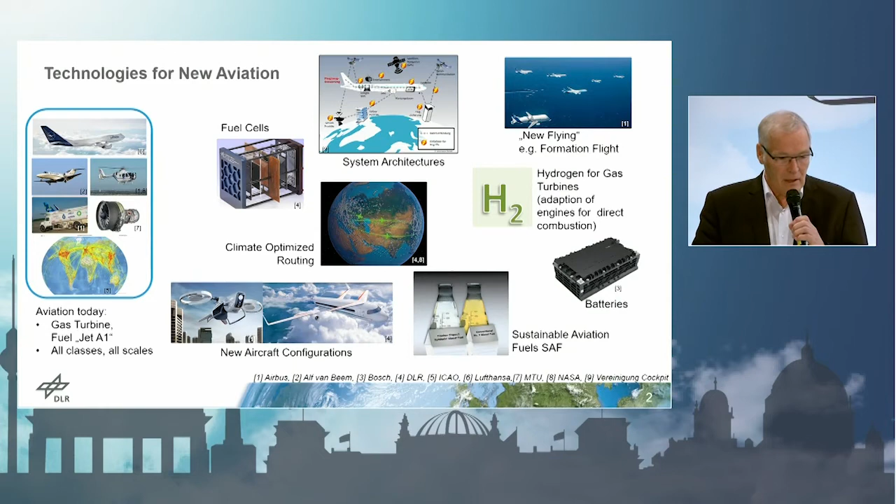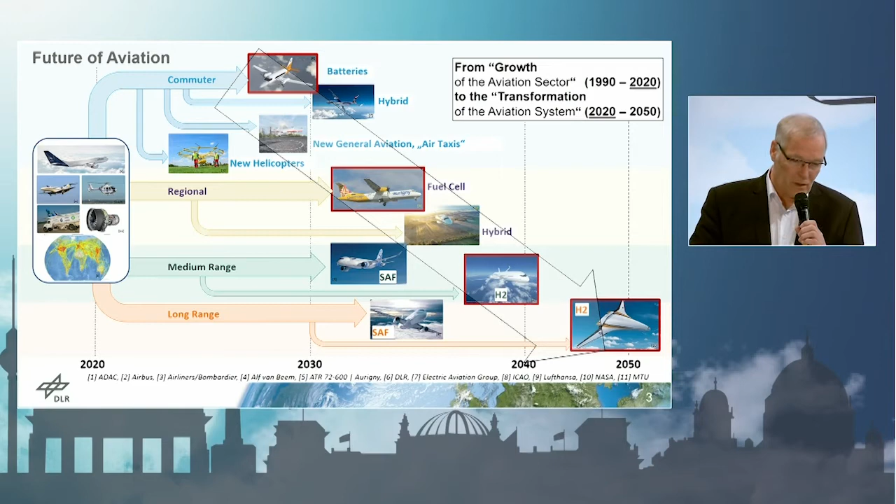Now we can use this toolbox for the future of aviation. It probably will start with smaller aircraft, and there we can check out very many things - batteries, fuel cells, flying fuels, etc. And then step by step go until we reach the long-range aircraft. Maybe this will be the hydrogen one in 2050. In general, from the growth - we have really stable growth for more than 30 years, 3 decades - we're now in the transformation of the aviation system for the next 3 decades until we have the Green Deal in 2050. So that could be the future, and the future may be long range with hydrogen.

This is a very famous picture from climate research. It shows the cooling and warming effects of different impact factors in aviation. On top you see CO2, but it's just one impact factor among several others, like NOx, water vapor, sulfur, etc. Almost 65% of aviation climate effects are non-CO2, so just 1/3 is CO2, 2/3 are non-CO2. Hydrogen application will not prevent all of these non-CO2 effects.

You see the arrows on the left-hand side. What's coupled to H2, if we burn it with the atmosphere, we will have NOx, water vapor, contrails, induced cirrus, contrail cirrus - so there will be a couple of influences and impacts even if we use H2. I'm in favor of everything, but we have to keep that in mind and find a solution for it.

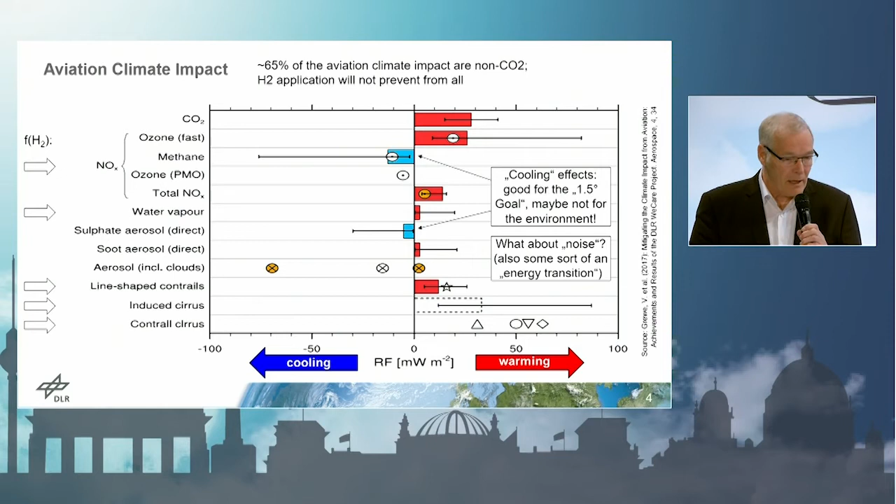There are a couple of papers around, some we introduced yesterday. We have the hydrogen-powered aviation strategy paper from joint undertakings, FCH and Clean Sky. We have in Germany the national H2 strategy, and we have the hydrogen strategy of the Commission. Application of hydrogen is by no means new - even the first balloons some 200 or 300 years ago flew with hydrogen, the first Zeppelins flew with hydrogen. We now see many European papers.

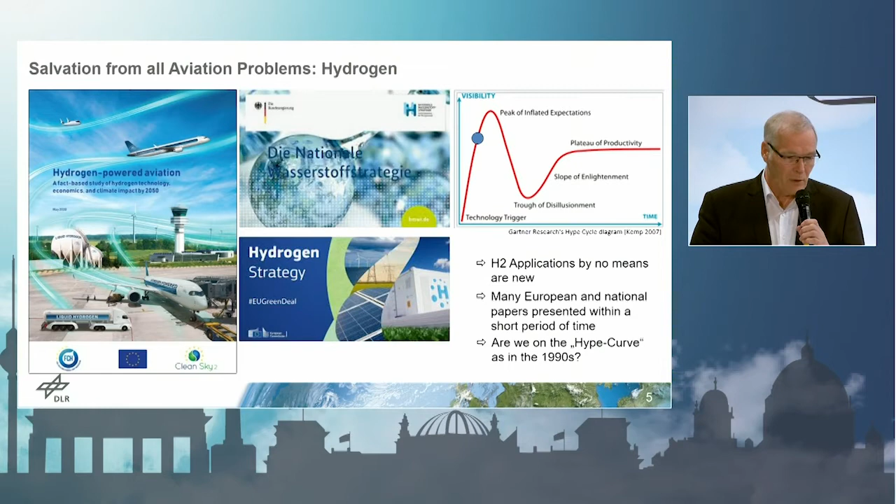The question is, are we on a hype curve, which you see the famous one on the top right? Are we there? That would be a danger, because then we could inflate the expectations from hydrogen. We really have to keep in mind there are a couple of problems around it. It's not salvation from all aviation problems. We really have to work on that, and there's a couple of things to do in research.

Now we are in this propulsion panel. See again what Conny already introduced, our speakers, our six speakers: Boscarol from Pipistrel, Marco Protti from Leonardo, Siegfried Knecht here with us from AREG, Rob Watson from Rolls-Royce, Jörg Sieber from MTU, and Nico Buchholz also here on stage as a senior aerospace executive. I would like to start with the first question to Ivo Boscarol, and he will give us a short presentation. The question would be, with Pipistrel being a forerunner in electric flying, what are your current plans and which are the big challenges ahead of you? Ivo, please.

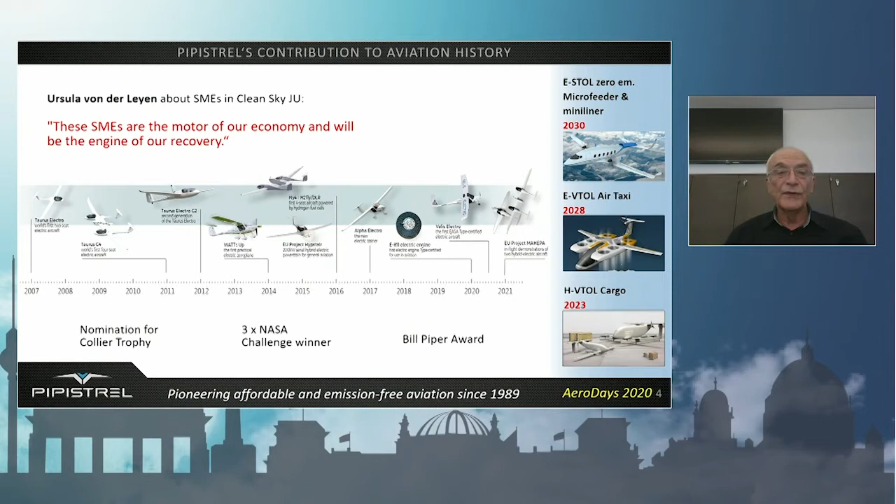I see that the slide is not the correct one. Sorry, the slides are not following me. Oh yeah, okay, I see. It's slow, this button, sorry.

Nowadays we are bringing passengers to the airports, which is wrong. It should be the opposite. We are destroying the best agriculture land to build large airports. We need a new concept which will bring the airports closer to the passengers.

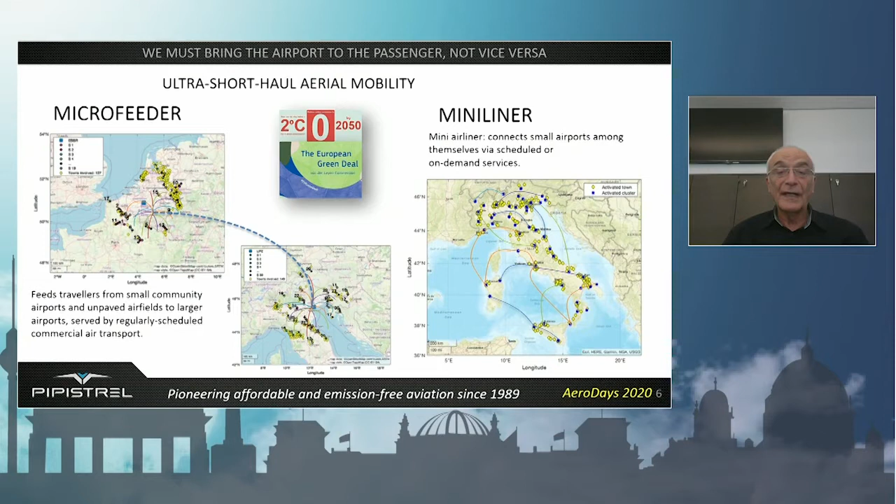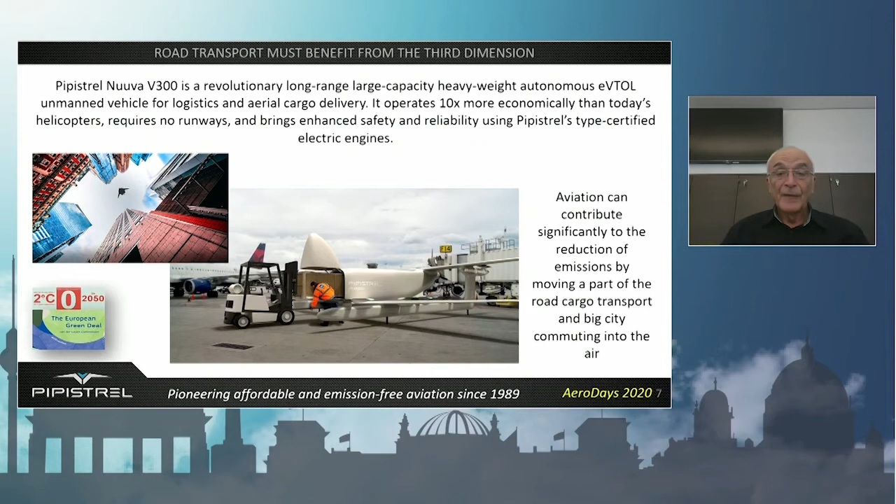Transport in the next decades must also be regional transport, and must be legalized also on small airports. But because of the increased population, better travel comfort and safety standards, the transport is increasing every day. Therefore, the existing mostly two-dimensional concept of transport is not efficient enough anymore.

We must benefit from the third dimension and we must move travels and transport into the air. We have only one way forward. All the participants must step together and the result must be reached. If we don't reach the results, and we don't all work in one direction, it will not help.

The atmosphere needs action immediately. European Green Deal guidelines are to be implemented to reach the needed and desired results, and must be followed also after 2030. By type certifying electric aircraft, Pipistrel opened the doors towards commercial use of electric aircraft.

Now, worldwide regulatory institutions must work hand in hand with stakeholders. I believe that automotive and aviation industry must cooperate in this process. Automotive industry must bring its standards closer to aviation ones, and aviation industry must adopt the advantages of lean and mass production, to make tomorrow's transport industry stronger and more profitable to meet the needs of citizens.

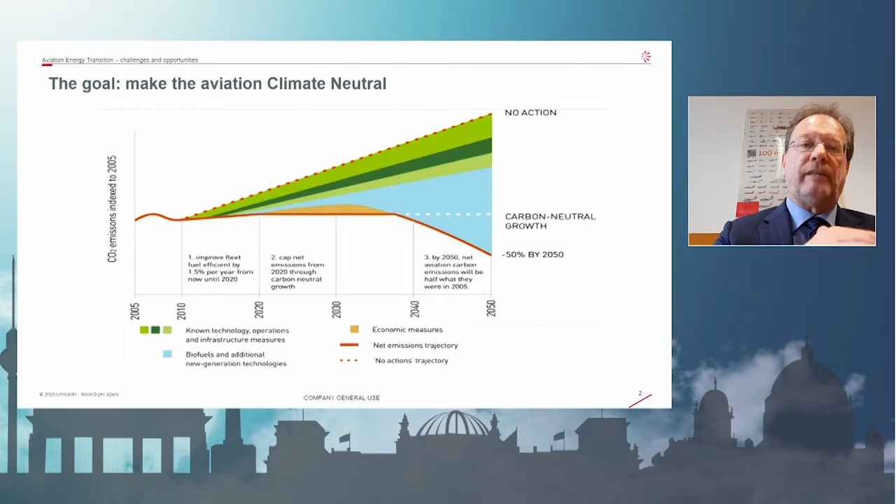We need to have a step change. We need to take a different approach compared to what we have done since 2007 in Clean Sky 1 and Clean Sky 2. Next, please.

We need to have a systemic approach in which we look to the full chain that provides, at the end, a safe, economic and sustainable air mobility for the benefit of our society, but fully compatible with the climate of the Earth, that is the only one that we have to use.

And there are four main areas that we have to address in a combined way, to accompany the transition across the standard way in which we are now managing air mobility, to a completely different approach that at the end complies with the basic requirements that air mobility has to satisfy in order to be an effective solution for the society. Next, please.

In doing that, we need to recognize that this is also an opportunity for our arena, in order to bring in new market opportunities, to mature products that can be different from the ones that we have now in our portfolio.

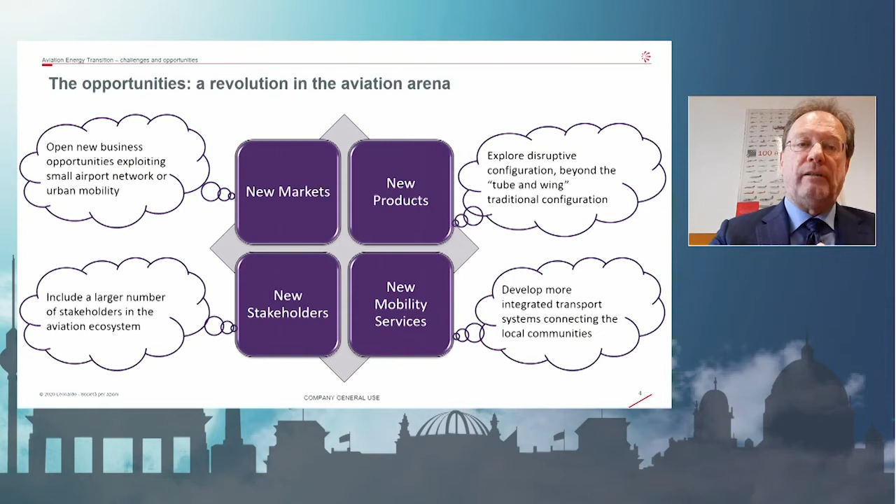But we need to recognize that we have some challenges in front of us, because we plan to use a quite different class of product, and we need to overcome some barriers that come from different business models, by the need to rediscuss some certification paths that we usually have in mind, that we need, in any case, to deliver competitive solutions for air mobility, not only in the production of the new aircraft, but also the capability to support them.

And all that, of course, while we are maturing a completely new set of technologies that are necessary to implement this solution.

So we need to start a roadmap, well integrated, that from the maturation of key enabling technology will at the end deliver new air mobility solutions that include not just the aircraft, but the whole chain, from the production of the fuel, to the delivery of the fuel to the airport, to the capability to operate safely the new type of product, and at the end to deliver air service at competitive price to society. Thank you.

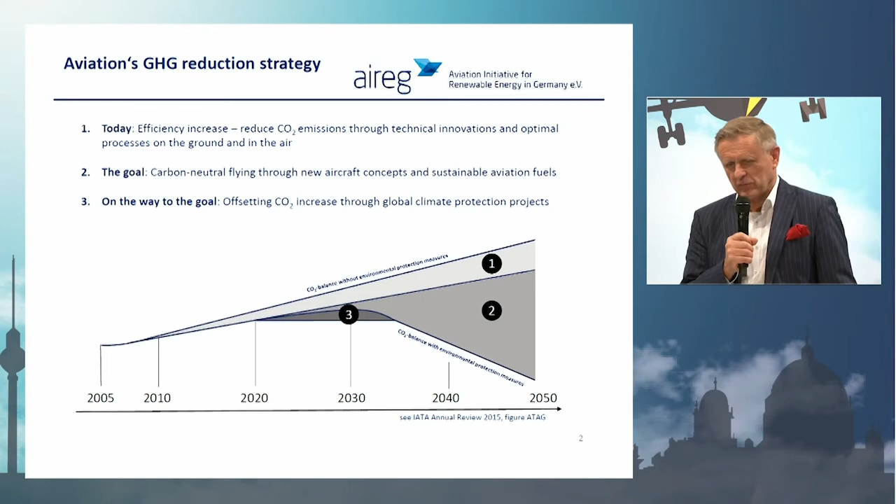You've seen this slide, I assume, a thousand times, and it was also shown a couple of minutes ago by Marco. What I'd like to emphasize here again is the light gray part of it. Of course, we all know there will be disruptive aircraft technologies available within the next one or two decades, but I, or the aireg members, are convinced that a major contribution will come, or needs to come, from SAF, from sustainable aviation fuels.

Today there is only little SAF available. You know, there are very few companies producing it today. World Energy in the US, Neste in Europe, just to name two of them, of the very few.

But I would say there is light at the end of the tunnel, because we learned recently that those engaging in the production of sustainable aviation fuel will probably make available around 10 million tons by 2030. And in addition, I also recently learned that there is basically enough feedstock available already today to comply with the amount of kerosene needed by 2030.

Of course, feedstock availability is one thing, production is a different story, so we need to see how this is going to evolve. But I guess we all need to take into account all the technology pathways and not only look, as is apparently being done in my country, only at the power-to-liquid pathway, because that's only being made available in significant amounts beyond 2030.

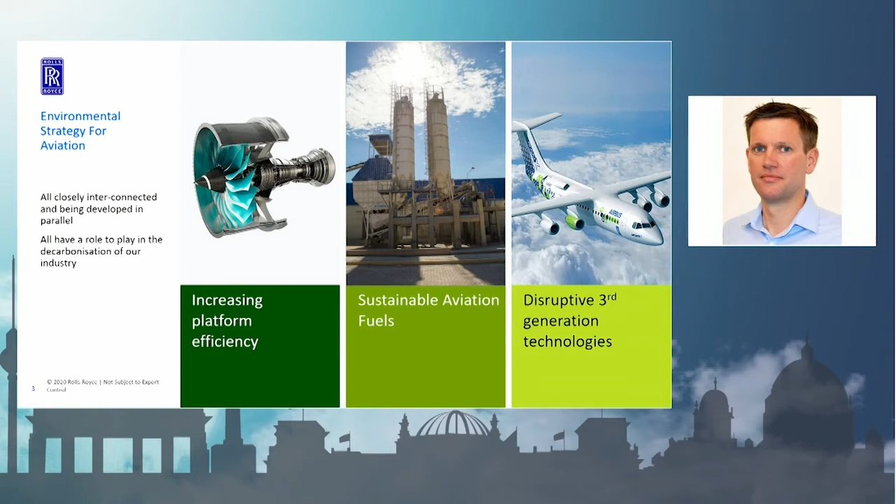But of course, we're also a global technology company, and my particular focus is in looking at those disruptive third generation technologies. Here, I think particularly the focus on electrification and what that may enable, and over time hydrogen, become really important.

And it is a significant number, and we will need to think about multiple ways to develop that fuel of the future. But for me, on slide 5, it's really all about the disruptive technologies. In Rolls-Royce, we've been looking at how we can bring our capability to bear to drive different options to push for sustainable aviation. Electrification, as Ivo has said, is hugely exciting with some great opportunities, both by driving hybridization, which I think gives it range and capability quickly, and full electric capability.

Those pictures you can see on the left-hand side - we're really proud to be supporting Airbus with the City Airbus demonstrator program, and we're developing our own hybrid system which could run in hybrid or full electric mode. In the middle of the slide at the bottom, you'll see the Airbus E-Fan X... I mean the Airbus aircraft we're planning to fly in the next couple of years, which will demonstrate the benefits of that hybrid and electric capability. In recent years, we've been very proud to partner with Airbus around the E-Fan X program, which has taught us so much about megawatt scale electrical propulsion requirements.

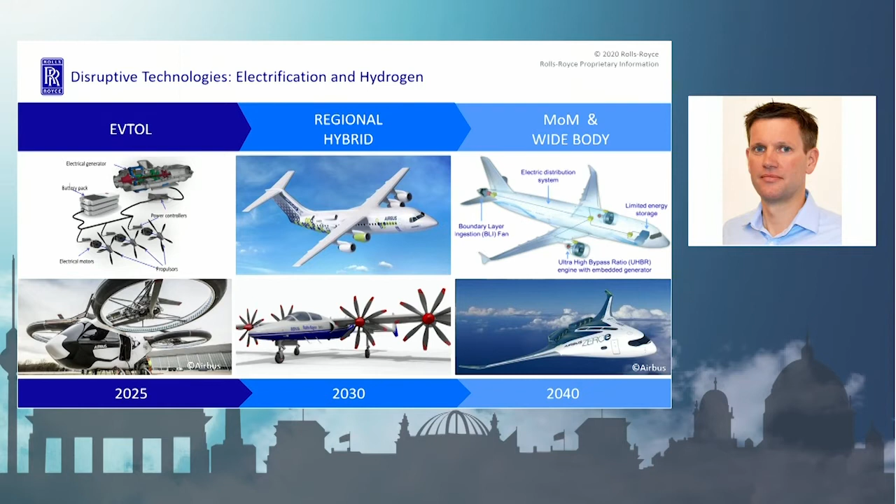How fast can we go to address some of these changes? And what is the true scale of the investment required to deliver this? Are we ready to invest sufficiently to drive the opportunity?

And I think at the same time, there is also a challenge. We talk a lot about the ecosystem, an enabling ecosystem, as Ivo described so brilliantly, how we should rethink travel. But we also need to think about the ecosystem in terms of how we deliver the technology. The supply chains don't exist today for some of this. It's very hard to create this new industrial capability. So alongside the focus on how quickly can we demonstrate something, how quickly can we move to a prototype, how quickly can we scale industrial capacity to help us realize the vision.

A further challenge we have to be thinking about today is commercialization, and some of my esteemed colleagues have already mentioned this point. Operators today want to see a new technology where the acquisition cost is cost neutral to introduce to a platform. And alongside that sustainability delivery, what about the operating cost? How do you drive down operating costs? How do you make this commercially irresistible to the market? There are huge challenges around how you translate technology into products that we need to recognize.

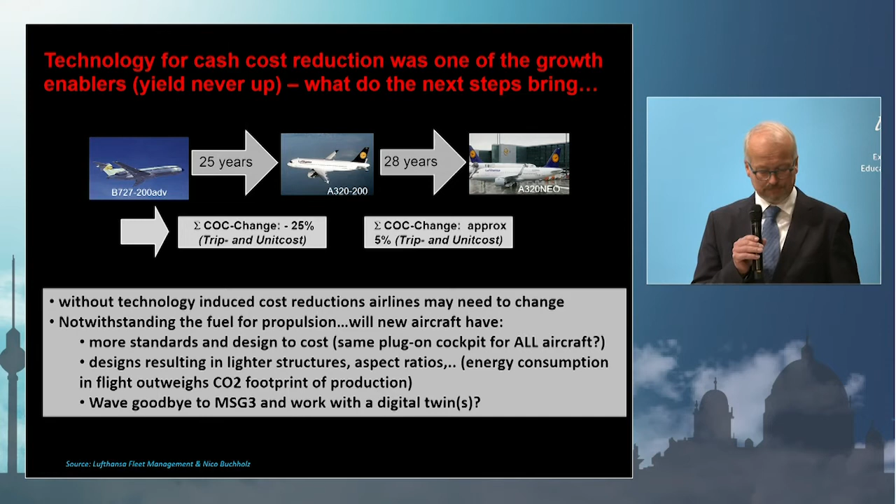But at the same time, knowing that these technologies and cost reductions have triggered growth, we have to look at what's next. And next, we're currently focusing on global warming or CO2 reduction, knowing that we need a holistic approach, as some of my previous commenters have said already. And so we need a global approach. A global approach really means—let's look at aviation. There are many bubbles around the world who want to create something as an alternative. We do have aviation—let me just pick a couple of things.

There's no real choice for urgent cargo, and the crisis has shown us that. There's no real choice for long-haul traffic unless we take a long, long time off. And we have a globally very fragmented view on air traffic. So in the past, fuel was just a cost element—I'm a bit provocative on that, but for most of us in the industry it was just a cost element. We became environmentally friendly by saving fuel, but it also hit the balance sheets.

If we look at tomorrow, we have hydrogen, we have fuel cells, we have many other options. And those options need to be assessed properly in order to be affordable, and they need to be embedded in a global policy, because we can't anymore create an environment by a certain region of the world or a certain company. I remember times when there was the noise perception—apparently there were lots of different ears around the world, even looking at Germany, France, the US and Asia. And we can't afford that split anymore.

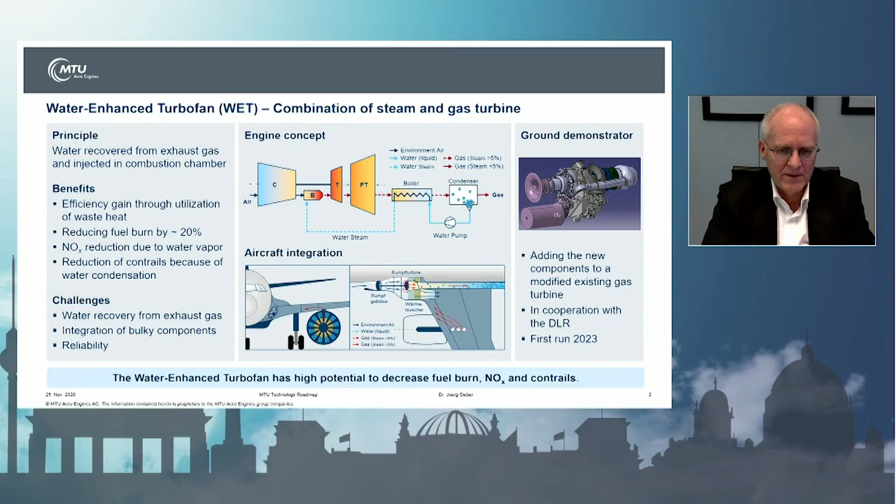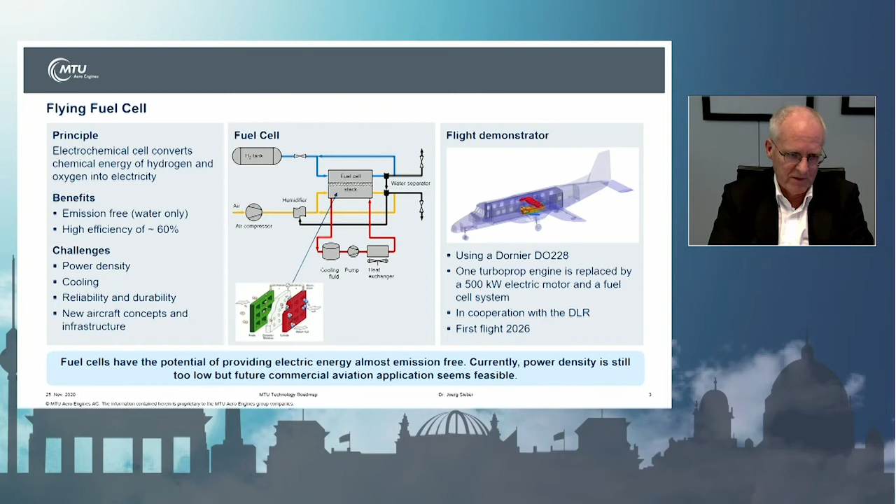Together with the DLR, we are just starting a project, a flight demonstrator, targeting 2026, where we replace a turboprop engine with a motor and the fuel cell system. Next slide.

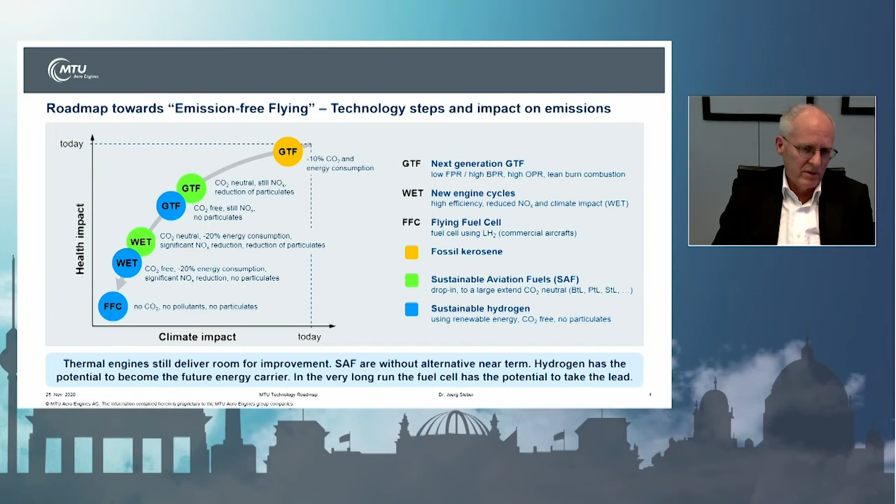And the last step will be the flying fuel cell, where we have no CO2, no pollutants, and no particle emissions. I think we have to offer society such an engine before the year 2050, because everyone on Earth is moving in the direction of climate-neutral industry, and we as the aviation industry have to do it too. Thank you.